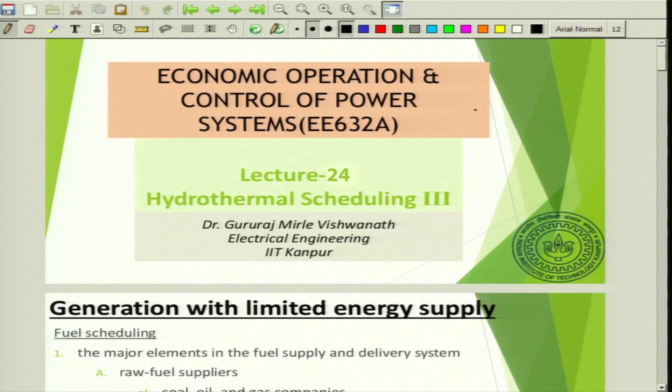So, today we continue our study with respect to hydrothermal scheduling. So, some of the constraints also need to be considered that I am going to discuss now while we plan for hydrothermal or even thermal scheduling as well. Like fuel scheduling is also one of the important aspects.

The major elements in the fuel supply and delivery system: the first thing is raw fuel suppliers. It could be coal, oil and gas companies, and there will be long term contracts with minimum and maximum limits on fuel per time period, right. And then prices may change subject to the renegotiation provisions in the contract, because before the contract beginning you might have fixed some price, like we have discussed about the take or pay policy, right.

So, there is an agreement which has been made for bare minimum usage for a specific duration. You have to use it anyway, and even if you do not use it you have to bear the minimum cost, because he has held his stock for your purpose. So, he is not delivering to someone else. But over a period of time, due to the global market scenario, the price may increase, oil price, gas price, and because of which renegotiation has to be done.

And transportation: not only the fuel suppliers have their constraints, even transportation, from supplier to the end delivery, there would be various means of transportation like railroads, river barges, gas pipeline companies, and they also play a crucial role and represent problems in scheduling of fuel deliveries. Let us say there is some strike in a transportation company, so you will not be able to deliver, though the supply is there and demand needs supply. So, this is another constraint.

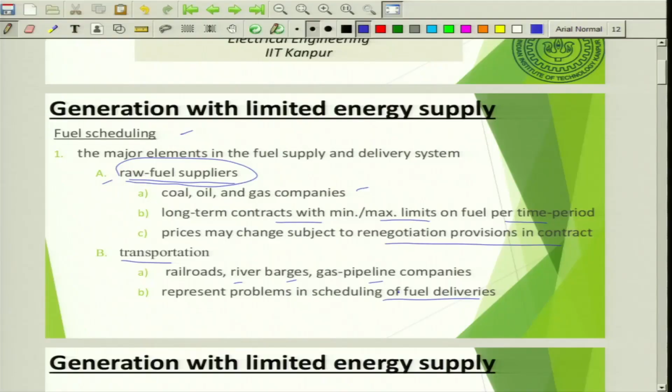And in fuel scheduling, the inventory is also one of the important aspects. Coal piles, oil storage tanks, underground gas storage facilities at the premises where you are generating, right. Keeping proper inventory levels to forestall fuel shortages. You should have proper inventory storage facility such that even in case of issues with the transportation or with the supply chain, you should be able to cater to the need, and the load levels may also exceed beyond the forecast.

You should have sufficient forecast, sufficient inventory available with you, in case suppliers or shippers are unable to deliver due to any reasons. And also generation stations need to be maintained well, so that they are able to participate in unit commitment.

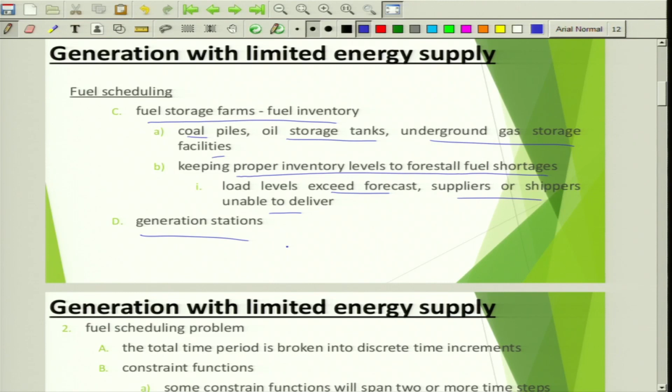Now, in the fuel scheduling problem, the total time period is broken into discrete time increments, right. Any fuel scheduling problem is solved like this. And there could be some other constraint functions which will span 2 or more time steps, or intervals. So, there could be some constraints seen across multiple time steps, like ramp rate. You cannot suddenly increase or decrease. This constraint may span 3-4 time steps together.

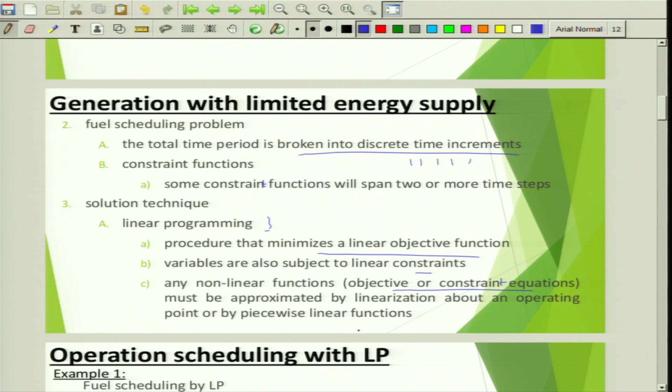So, what are the solution techniques? We can use linear programming as well as dynamic programming. It is a procedure that minimizes a linear objective function, with variables subject to linear constraints, right. Any nonlinear objective or constraint equations must be approximated by linearization about an operating point or by a piecewise linear function. So, the nonlinear function is divided into multiple pieces to look like a linear function, and then you carry out linear programming. So, let us try to solve the operation scheduling with linear programming, considering the fuel constraint.

Now, the data show that there are 2 coal burning generating units, right. I am not speaking about hydro as of now. Both must remain online for a 3-week period. The combined output is to supply the following load: week 1 it's 1200 megawatt, week 2 1500, and week 3 it's 800 megawatt. One coal supplier is under contract to supply 40,000 tons per week to be split between the 2 plants. A take or pay agreement has been signed, where this coal supplier is supposed to deliver 40,000 tons per week.

And there are existing inventories at the start of the 3-week period. So, there is also some inventory available with these generating units. Now, what is the objective? To find the operation schedule for each plant for each week and the coal delivery amounts to be made each week.

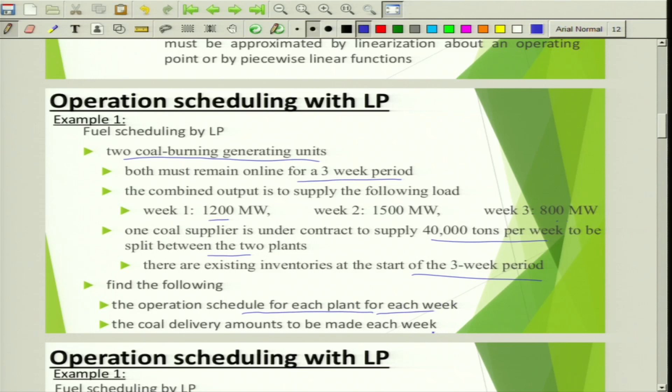What is the amount of coal delivery that needs to be done and what is the operation schedule? And there is some more data. This is the heat value, 23 MBTU per ton, cost is $30 per ton, and then the inventories that I have already told for 3 weeks.

Plant 1 already has a stock available of 70,000 tons, similarly plant 2, and each plant has a maximum coal storage of 2 lakh tons. It is not that you can have an infinite amount of storage. So they have maximum storage up to 2 lakh tons.

Generator 1 has minimum and maximum generation capacity of 150 megawatt and 600 megawatt, and this is what the linear approximation looks like here. H1 of P1 is 380 plus 8.267 P1, and Q here represents the fuel consumed, which is a function of the generation output P1. From this expression you just divide by 23 MBTU per ton and you will get this expression.

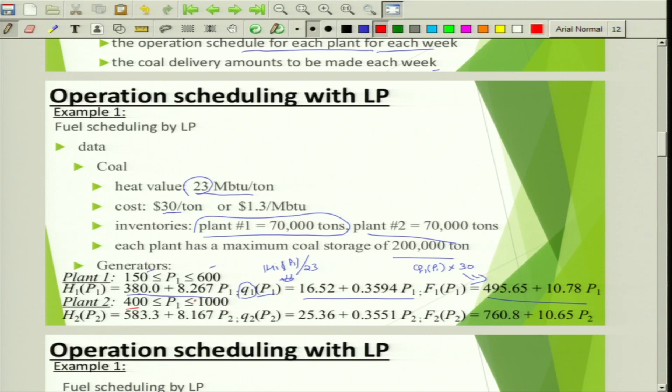H1 of P1 divided by 23 will give you this, and then Q1 of P1 into 30, because 30 is the cost, will give you this expression. Then similarly you do it for plant 2, which has limits of 400 and 1000 megawatt. Now you get Q2 of P2 and F2 of P2.

Now we are going to the solution process. Assume that the units are operated at a constant rate during each week. Coal deliveries are made at the beginning of each week; the delivery should happen before the start of the week. The problem is set up for a 1 week time interval.

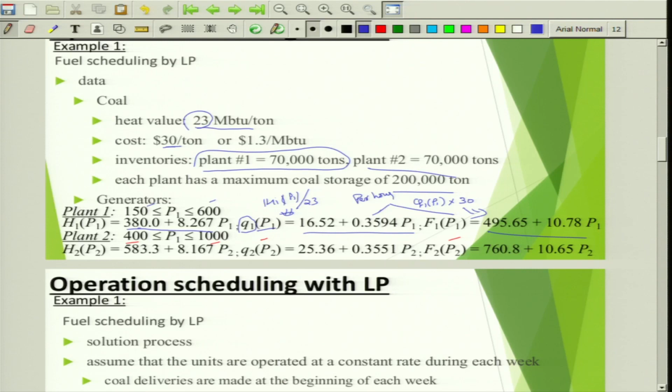Then for plant 1 and plant 2, I am obtaining Q1 of P1, F1 of P1 and Q2 of P2, F2 of P2 for the entire week. The data we have calculated, Q1 of P1, F1 of P1, is per hour. For per week, Q1 of P1, F1 of P1, Q2 of P2, F2 of P2 should be multiplied by 168, which is 24 hours into 7 days. So you get this data.

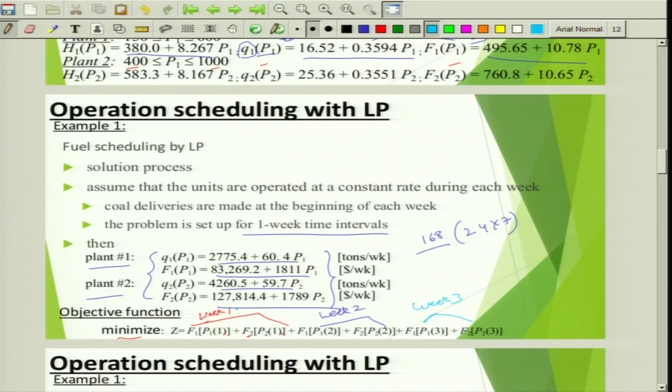Now what is the objective function? The objective is to minimize the total fuel consumption for the 2 units for all 3 weeks. This is fuel consumption for generator 1 for the first week, fuel consumption for generator 2 for the first week. So this is for week 1, this is for week 2, and this is for week 3, for generators 1 and 2 put together.

I am formulating some equality constraints. Power delivery P1 of 1, P2 of 1; try to be very familiar with the terminologies here. The subscripts 1 and 2 represent generator 1 and 2. The number within the bracket represents the week.

P1 of 1 plus P2 of 1 is equal to 1200 megawatt. Here this is 2, not 1. So P1 of 2 plus P2 of 2 is equal to 1500 megawatt. Similarly P1 of 3 plus P2 of 3 is equal to 800 megawatt. The generation should be equal to the load.

And then correspondingly the coal deliveries: this is the fuel requirement of generator 1 for week 1 and the coal input for generator 2 for week 1; put together it should be 40,000. Similarly for week 2 and week 3, this is the same number.

And similarly, there is the volume of coal. This is the volume of generator 1 for week 1. Now, at the end of week 1, before going to week 2, what is the total volume of coal available for generator 1? That is what we are calculating here.

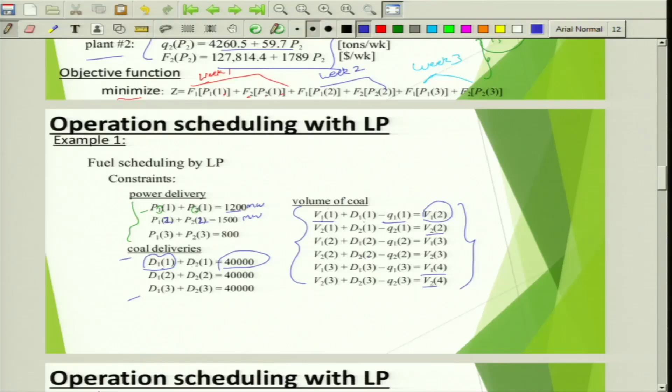Ultimately you will get for week 4 also, because this is for the next week, though we are not interested, but ultimately we will have some coal left out for the next week schedule. So this is what has been placed here. Now what we have done is there are so many constraints and so many weeks, and all of them put together in one single chart, you could get the complete constraint list.

For example, let us try to walk through this table. Let us say this is on the left hand side, you can see there is a total of 12 constraints put together. You can see here what we have done is, these are the different variables like D1 of 1, as I already told, the input coal to generator 1 for week 1 and coal input to generator 2 for week 1.

These D's represent the coal input for all the generators. And there is another thing which is the generation, P1 of 1, P2 of 1, these are all generators' power output, P1 of 3, P2 of 3, that depends upon the load. And similarly, you have the total volume of coal that is left out as input to the next week. So this also is there.

Now you can see here what it indicates. First constraint, P1 of 1 plus P2 of 1 should be equal to what? This is 1200 megawatt, this is the load demand. We are just putting whatever is there in the same table, nothing else.

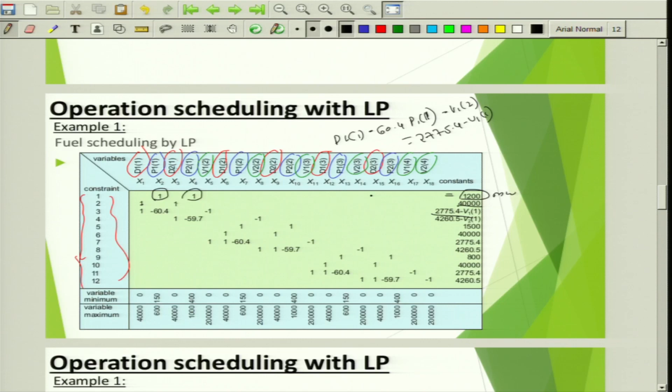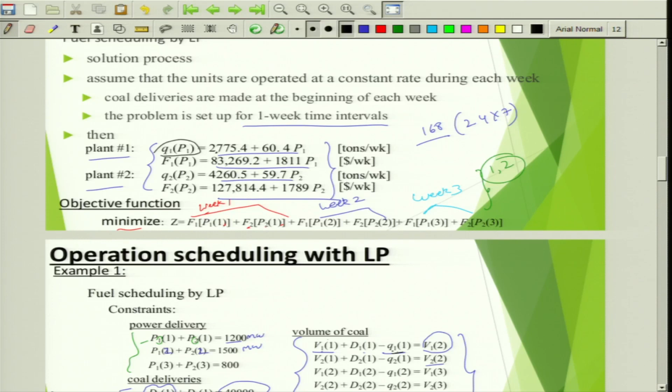You can see here, this one, Q1 of P1, because based on this expression ultimately you need to replace for Q1 of 1. So minus Q1 of 1 means minus 2775.4 minus 60.4 P1. So if you just replace that expression, then you will get what is nothing but V1 of 2, that is the thing.

Similarly you do it for all the constraints, and similarly in the downside also you can see there is also variable minimum and maximum given. That means for D1 of 1 the minimum is 0, maximum is 40,000, and for P1 of 1 minimum is 150, maximum is 600. Like that, for each variable there is a minimum and maximum given also.

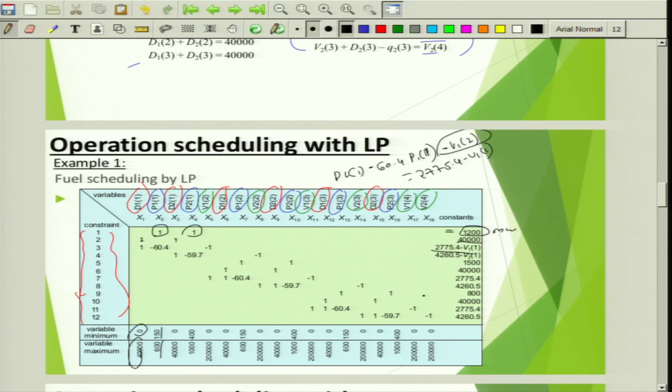Now this is a complete table, and once you have this kind of table, you can solve this operation schedule by simply using a MATLAB program. So you need not have to work it all out, the ready-made function is already there in MATLAB. You can solve it and have a feel of how this looks, and you can also try to solve it on pen and paper to get that feel of how this program is working.

Fuel scheduling by linear program. This linear programming can be solved in MATLAB. This is just a function that you need to type in the MATLAB command window.

Linear programming - these are the different objective functions and the constraints. So this minimizes the optimization options specified by input arguments. These are the input arguments. So where f is, what does f indicate? The objective function, minimize the fuel cost, and ax - here a and b represent the inequality constraints.

That means the total consumption should be less than or equal to 40,000 or whatever, and then a equivalent of x equal to b equivalent indicates the load demand, P1 plus P2 put together for a specific week, it could be whatever amount of load. And then there is also limits with respect to the generation - it should be greater than 150 and less than 600, for example. So all these constraints are what has been put up as the input argument.

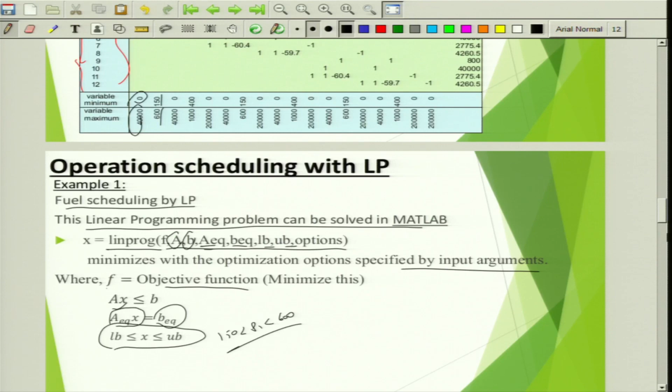Then it will solve and give you the ultimate dispatch. Next we will move on to dynamic programming, hydrothermal scheduling with dynamic programming. A single hydro plant is operated in conjunction with a thermal system with storage. Now we discussed only about thermal, now we discuss about thermal plus hydro using the dynamic programming approach. It is serving a single series of loads PL. Time intervals are denoted by J, where J runs between 1 and J max.

So, the time intervals are J and the load is termed as PL. There are so many notations that we need to understand. What is RJ? RJ is the net inflow rate with respect to water. Vj indicates the storage volume at the end of period J.

There is a net inflow into the reservoir, and there is an outgo. So what is the storage volume, the total volume available at the end of period J? Then Qj is the flow rate through the turbine, the outflow. Rj is inflow, Qj is outflow, understand.

Based on Qj, the PHJ output is depending. Let us say Qj is 0, then there will not be any power output because there is no input for the turbine. Sj is the spillage rate, because when water is flowing, so high flow is there, there could be some water which is outflowing above the reservoir. I have discussed this in the beginning.

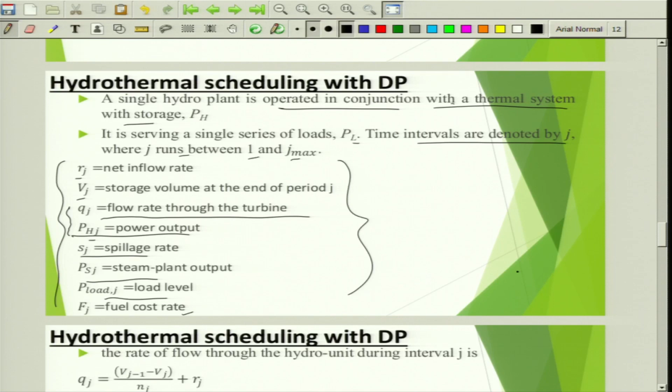Psj is the steam plant output. Similarly, there is a power output from the steam plant, and P load J is the load level. Fj is the fuel cost rate, this fuel cost rate for the thermal power plant.

Now, the rate of flow through the hydro unit during interval J: Qj is the rate of flow through the hydro unit, equal to Vj minus 1 minus Vj, divided by Nj, plus Rj. That means what is it indicating? So this is, now we are interested to calculate the outflow at the end of the jth interval.

Now what is happening? Whatever was the volume present before this interval, and whatever is the volume of water at the end of this interval, you will get the net total amount of volume. Nj indicates total number of hours, so per hour we are finding out what is the outflow. This indicates per hour the total accumulation of water, even though there is inflow and outflow within the reservoir. There is a net accumulation of water, plus this indicates the inflow.

That means, let us try to understand this by keeping one constant and varying the other. Let us say the total volume, the net volume is 0 - this entire term is 0. That means at this specific interval, there is no net accumulation of water taking place. That means, what is happening?

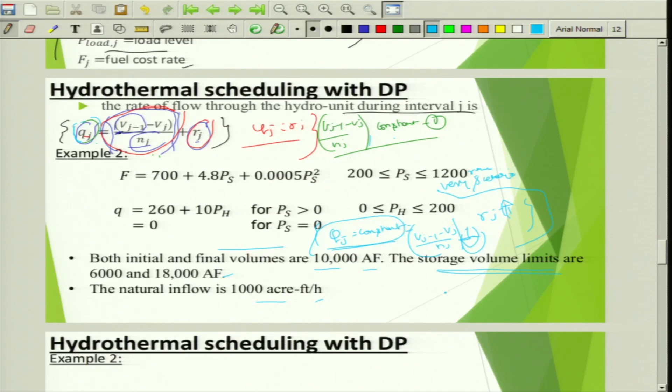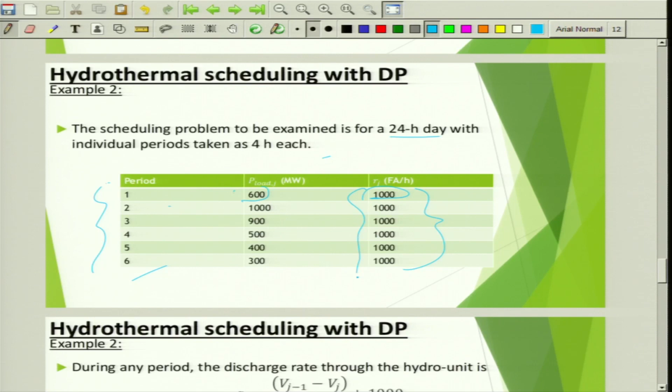Now during any period the discharge rate through the hydro unit is Vj minus 1 minus Vj, because Nj is 4 here, number of hours is 4, plus this is the inflow 1000 acre feet per hour. So this is what the discharge rate of the hydro unit.

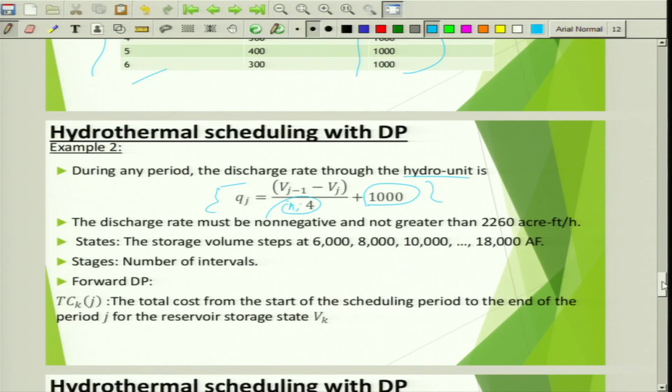Now the discharge rate must be non-negative and not greater than 2260 acre feet per hour. You can see this, you can get this number from this expression. There is a Q here given. So you just put 200 to this, you will get what is the total.

And then, because dynamic programming I have already discussed, there is states, stages. So what are the states here? The storage volume steps at 6,000, 8,000, 10,000, 18,000 acre feet. These are the steps, different states, and stages is number of intervals, and we are trying to solve using forward dynamic programming.

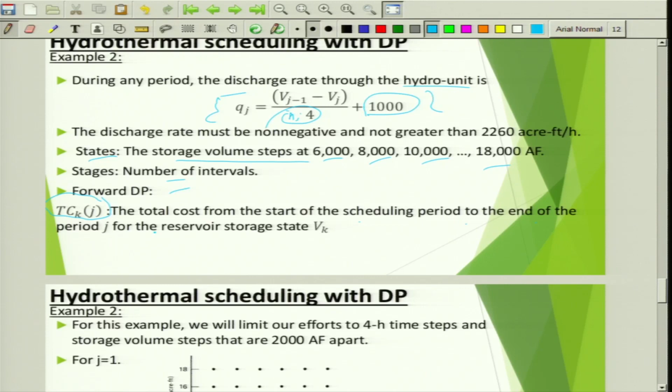So there is another term which is TCKJ. This indicates the total cost from the start of the scheduling period to the end of the period J for the reservoir and storage state Vk, because this we need to minimize, total cost we need to minimize. For this example,

we will limit our efforts to a 4-hour time steps. Now there are, that is why you can see 1, 2, 3, 4, 5, 6. In the x axis we have period or the interval stages, and the y axis you have storage volume. So this we are starting from 6, 8, 10, 12, 14, 16, 18.

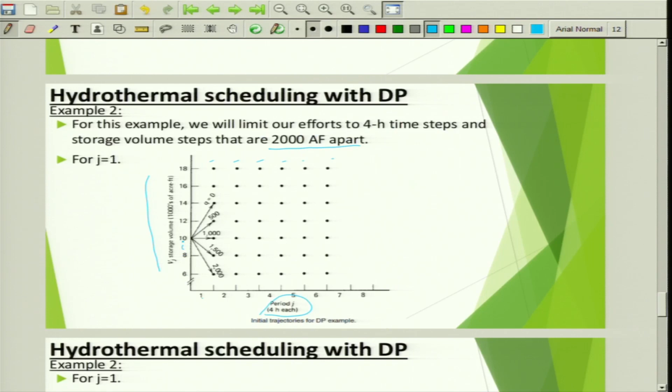So for this example we will limit our efforts to 4-hour time steps and storage volume steps that are 2000 acre feet apart. You can see this difference of 2000 acre feet for j is equal to 1 for the first interval. Let us try to understand how we get this cost here for the first interval.

So there are these possibilities, you are starting from 10,000 because that is the data given here. Both initial and final volumes are 10,000 acre feet. You are starting from 10,000 acre feet.

So starting from 10,000 acre feet, we are here. Okay, so let us take the first case, 14,000 acre feet. So you are reaching up to 14,000 acre feet starting from 10,000. So what is the Q for the first condition? Q is nothing but Vj minus 1 minus Vj by Nj plus Rj.

Vj minus 1 is 10,000, minus 14,000, divided by 4. What is the inflow rate? 1000. What you will get? This is 0.

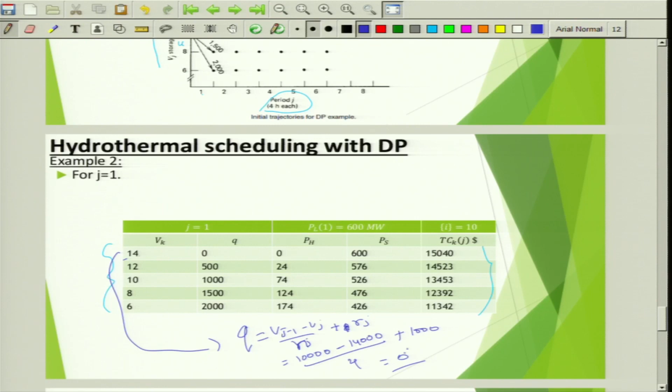This is 0, that is what you got here. If outflow is 0, then what is the power output? 0. That means for j is equal to 1 interval, the load demand is 600 megawatt. If hydro is not able to generate any power, then total power is being supplied by the thermal power plant. And what is the cost associated with thermal power plant?

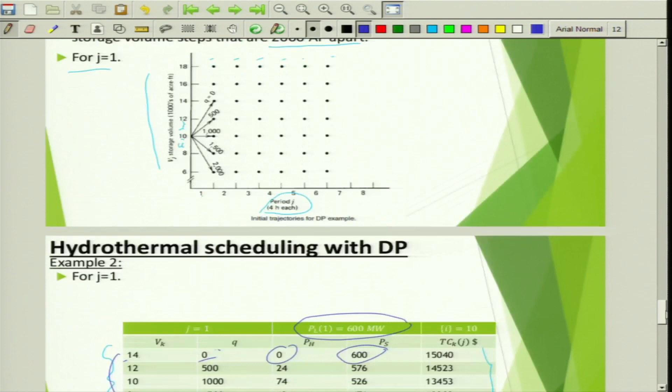How do you calculate that? It is very simple. Go to this expression. Fuel cost characteristics is already being given. To this expression you just have to put PS is equal to, for the first case, 600 megawatt. Then you will get this number, 15040.

This will also help you understand some aspect here. Let us say if there is an inflow but outflow is 0, then there is a volume increase. Earlier it is starting from 10,000 because water cannot go anywhere. So 10,000 is the starting, before the starting of the interval, 10,000 was the amount of volume in terms of acre feet which was stored in the reservoir. Now at a constant rate of 1000 acre feet per hour, the water is being flown inside, and that is the reason at the end of that interval, 4-hour interval, you could see the water has raised from 10,000 to 14,000.

1000 into 4, 14,000; 4,000 plus 10,000, the total volume of water is 14,000. Water has not gone anywhere, it has been stored. That is the reason there is no net discharge from that reservoir, and the hydro is not generating any power.

Similarly, if you go to the next, you see here, that means 12. If 12 is the case, then what is happening? Then your Q would be 500. Just put it into this expression: 10,000 minus 12,000 by 4. 10,000 minus 12,000 is minus 2,000, by 4 is minus 500. Minus 500 plus 1000, you will get 500. This is what you get.

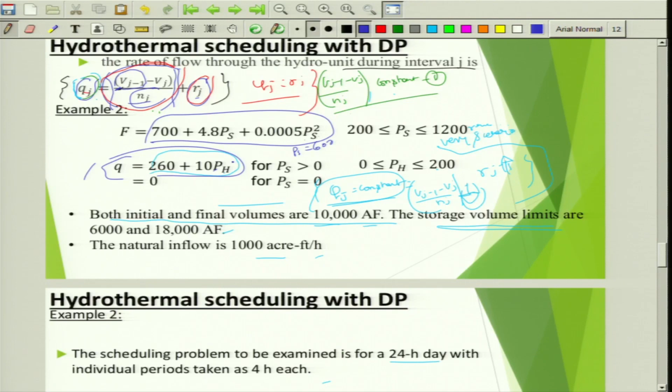So if 500 is the volume of water, based on that you can find out what is PH, because there is already a linear expression given to you. There is a relation already established. So you know what is Q, you can see what is PH. Now once PH is known, what is the thermal power output? It's just PL minus PH. So you would get this number, 576 megawatt. You put that into the thermal fuel characteristics and you would get the total cost from the thermal power plant.

So ultimately what we are trying to do is, over a period of intervals, find out the optimum utilization of hydro that would result in the minimum cost of generation from the thermal power plant, because thermal and hydro are running in parallel now.

Now from this specific time interval, the jth interval, I can keep it as it is, because it is in my control now. How much water I want to discharge is, as an owner, as a controller, in my control. I can keep it as it is, meaning 10,000. Earlier it was 10,000, now also it is 10,000. That means whatever inflow there is goes out as outflow. Inflow is 1000, outflow is also 1000. Then hydro is generating 74. That is 13,453. Whether that is economical, need not be.

So then you have to see, okay, I will not discharge, let me store, and I am getting some amount of power and cost from the thermal. Then let us say I will discharge water completely; the minimum is 6,000, that is what is given here, 6,000 to 18,000. That is why we are considering these cases here. So 6,000 at the end of that interval.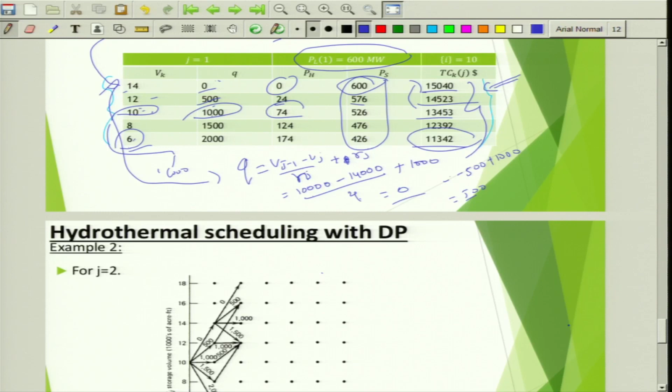But this is a picture of only the first interval, the jth interval. If you go on to the next interval, the dynamics may change, and you have to finally find the path of water usage for the hydro power plant that will result in reduction in total power cost. For j equal to 2, you would come out with this kind of analysis. I will not go in detail. Somebody can work it out using dynamic programming: the cost associated with the jth interval, accumulating the total cost. You remember how to solve dynamic programming using the forward approach.

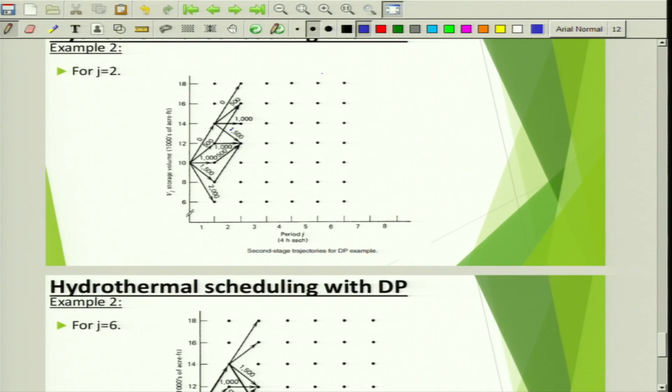And at the end of j equal to 6, the picture looks something like this. From 10 to 14 and then 6. So this is the path it is showing. You start with 10, go to 14; it is not saying start from 10 and go to 6. That does not give you the complete overall cost. So from 10 to 14, then 14, and then you ask it to come to 6, then 10, then 6, something like this. This gives the complete picture. This is what we are ultimately interested in.

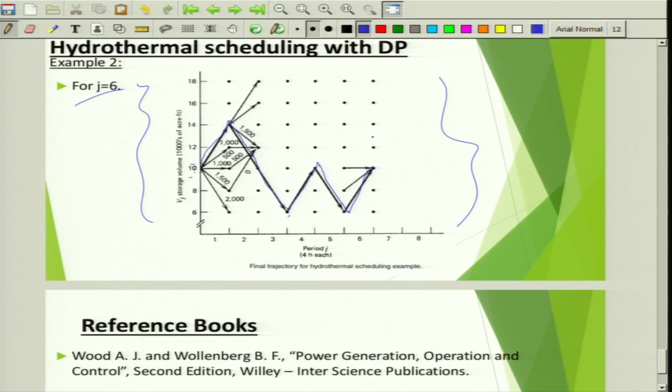So with this we have completed hydrothermal scheduling.